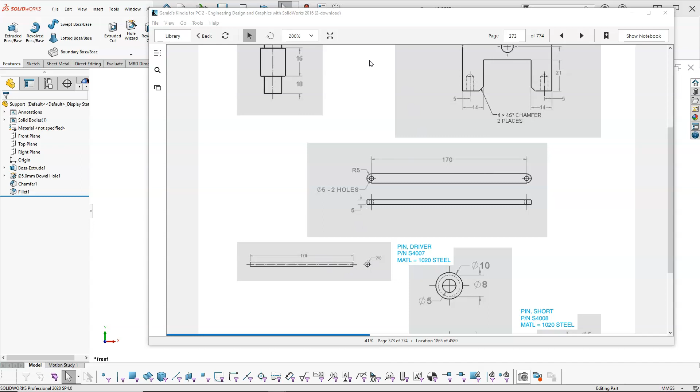Okay, we have two more parts to make. We already made the pin, so we're just going to repeat the pin process real quick, and then we'll move on to the arm.

All right, so File, New, pull up our millimeter part, and go with the front plane. Open up the sketch. Let's try the S key, see what we get with our pop-up. So there is the circle. We'll attach it to the origin. Right click, go right into the dimension, and set it to 8 millimeters.

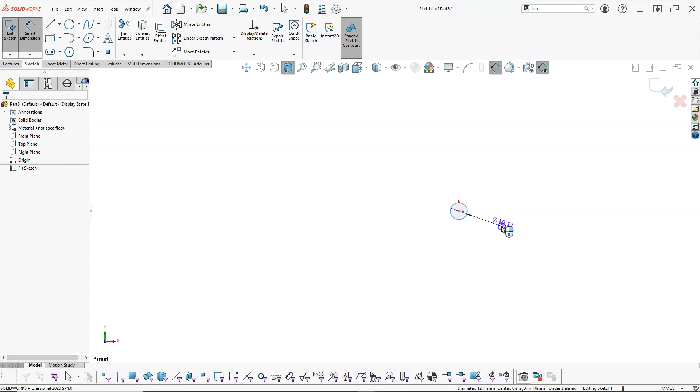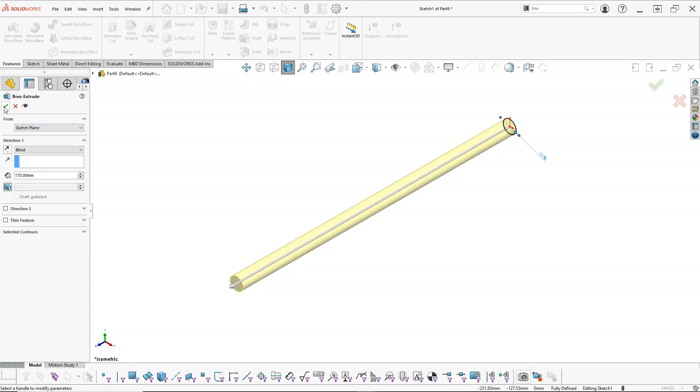Alright, since there's no other geometry, this one will go pretty quick. And this is going to be 170 millimeters in length. I'll just hit Control 7 - I was hitting Control 8, it went normal too. Control 7 to get to isometric. And then we'll save. This is going to be the rod.

Alright, another new. Part millimeter. Front plane. We'll open up the sketch. And we could do the rectangle. We could make a rectangle as a center rectangle and start at the origin and move out.

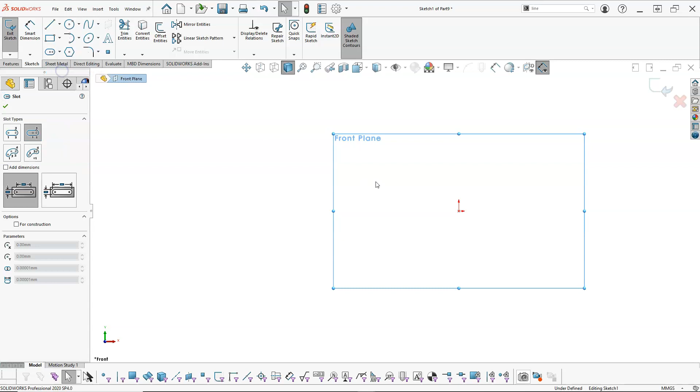Or, since we haven't used the straight slot, which generally generates an obround, let's go ahead with a center point straight slot. We think of the slot as a negative, but as long as it's generating the obround, we're going to be creating the positive.

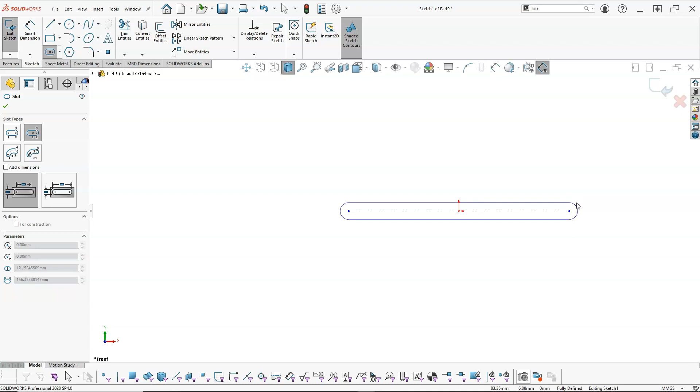So I picked the origin, mainly out of habit, and we're dragging the center line out. When I let go, nothing really happens until I drag. Once I start to drag the geometry, that's what's going to generate the obround shape. So let's right click, go right into the Smart Dimensions.

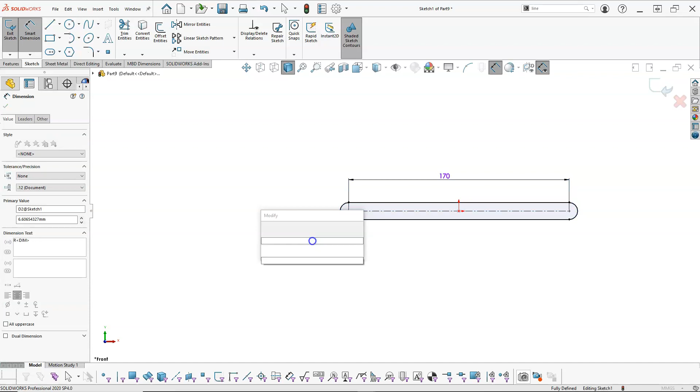We have 170 millimeters on the length. The radius is 5 millimeters, so since the ends are arcs, it's going to go automatically to radial.

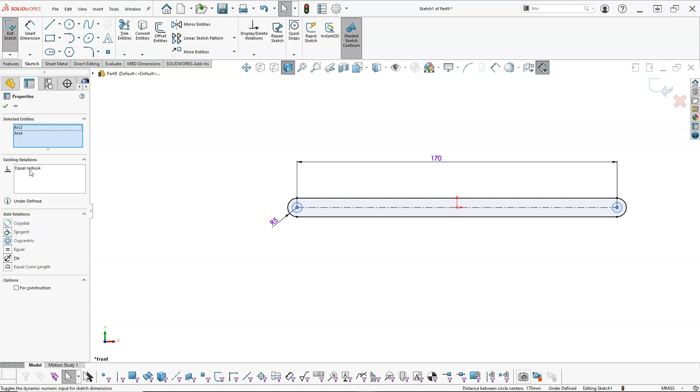And then we can come over and pick two circles. Since I'm still in the circle tool, we'll go grab the other one. Right click, select. Hold down the control button and select both circles. We're going to make those equal. And I can always verify if I'm not sure it completed - I can go to equal radius and make sure that it applied the relation.

And then 6 millimeter diameter, back into features, extrude, and this is going to be 5 millimeter thickness. Okay, and then we can save this as the arm.

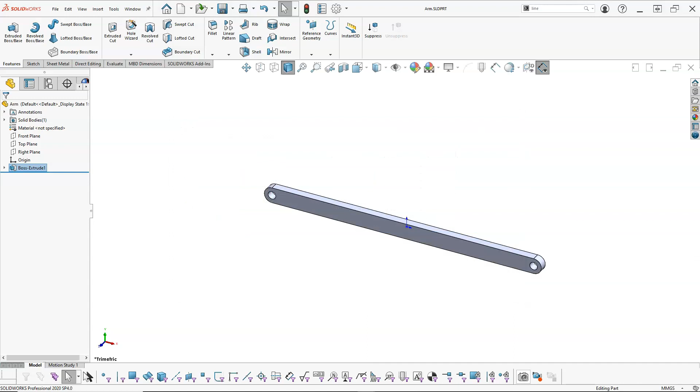Alright, so that should be all of our parts. We'll do a quick check, make sure I didn't miss anything. And then the next video we'll start the assembly.